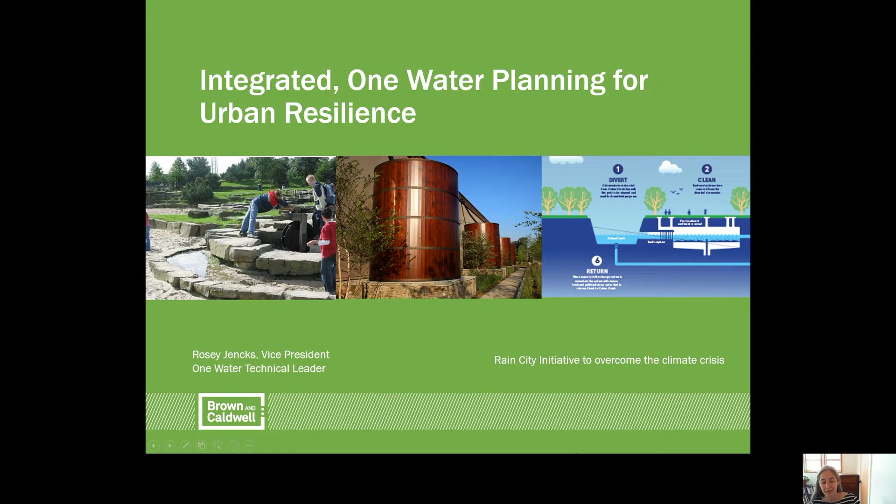Professor Hahn asked me to talk about the role of rainwater in a one water approach and describe some of the trends I'm seeing in North America.

One Water is an integrated planning and implementation approach for long-term resilience and reliability that meets the needs of communities and ecosystems. It's about managing all aspects of the water cycle from the top of the watershed to the bottom, encompassing all the natural and built sources and sinks of water.

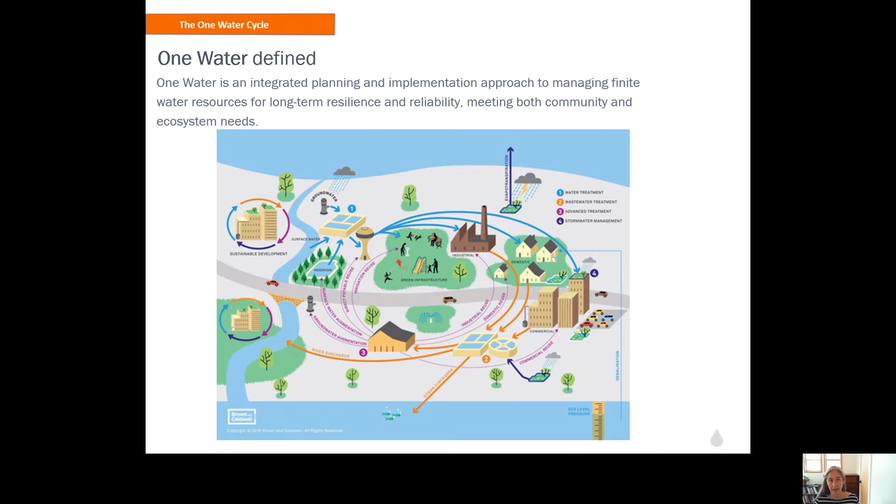As Luna Leopold says, the health of our waters is the principal measure of how we live on the land. In urban areas, we are rebuilding our watersheds every day. Each time we pave a road, build a house, or plant a garden, we have an opportunity to slow, sink, cleanse, and infiltrate stormwater. Rainwater is the most unifying one water element in our communities.

We can all agree that water doesn't follow jurisdictional boundaries and that watershed health and a one water planning approach cannot truly happen with our current regulatory and infrastructure paradigms. There are too few incentives to compel organizations to work together or to consider the full water cycle.

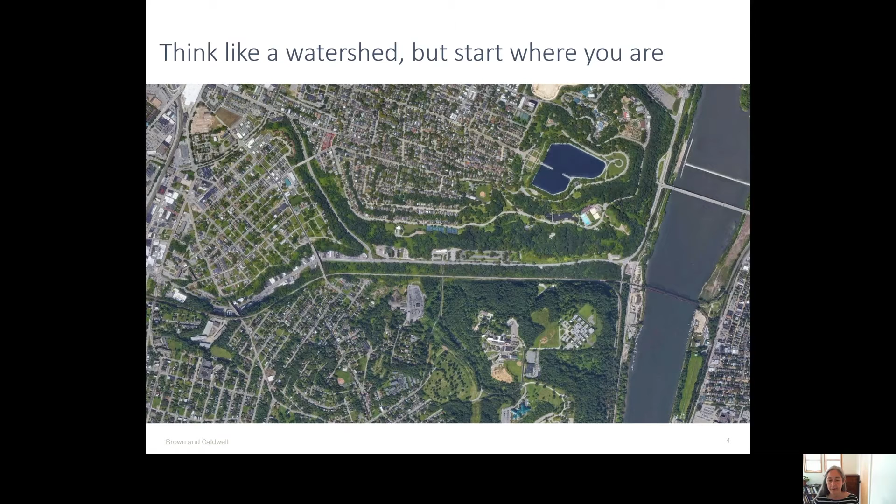Climate change is beginning to force these issues, but until we have new systems of governance and infrastructure funding, it's critical to think like a watershed, but to start where you are.

Today, I'm going to discuss the trends I'm seeing in North American cities. These trends include integrated planning, using risk-based approaches to integrate water quality with flooding and sea level rise, and using social and economic factors in engineering analysis, and working across jurisdictions to create multi-benefit solutions to solve citywide problems.

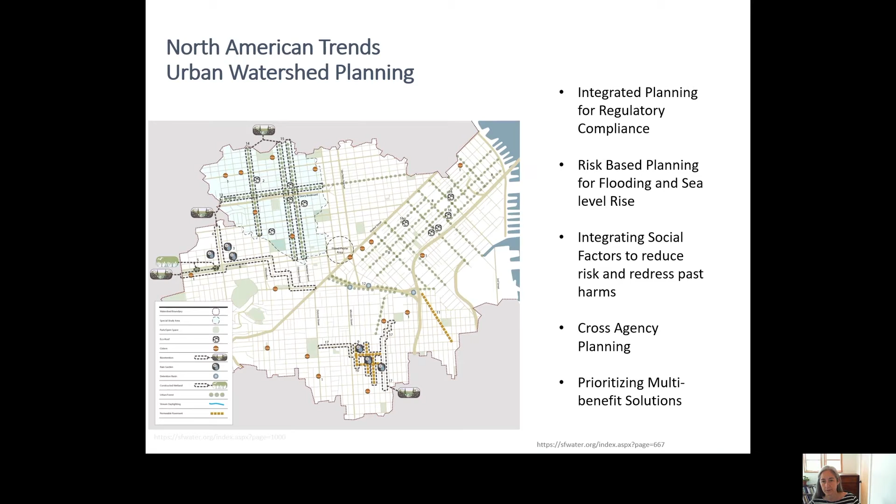Several cities like San Francisco, California, Vancouver, British Columbia, and Seattle, Washington are opting to bring in a wider set of considerations into their planning and going beyond simple regulatory compliance.

I'm working with the City of Vancouver on their sewer and rainwater management plan to integrate green and gray infrastructure for climate resiliency while seeking reconciliation with First Nations.

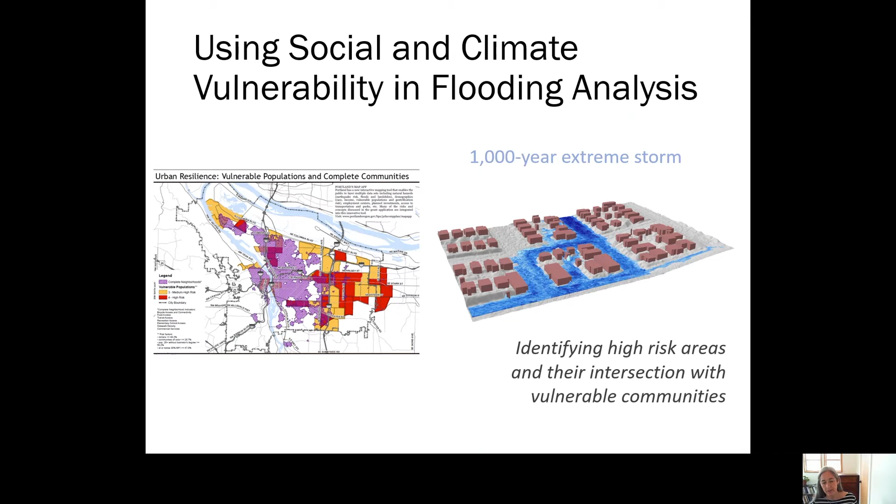Another trend that is worth mentioning is that engineering practice is beginning to integrate multiple forms of risk into decision-making. No longer is water management or flood management simply a technical consideration.

We are using information on social vulnerability and economic factors to overlay these factors with watershed and infrastructure needs to identify opportunities for multi-benefit projects that reduce risk in the most vulnerable communities first.

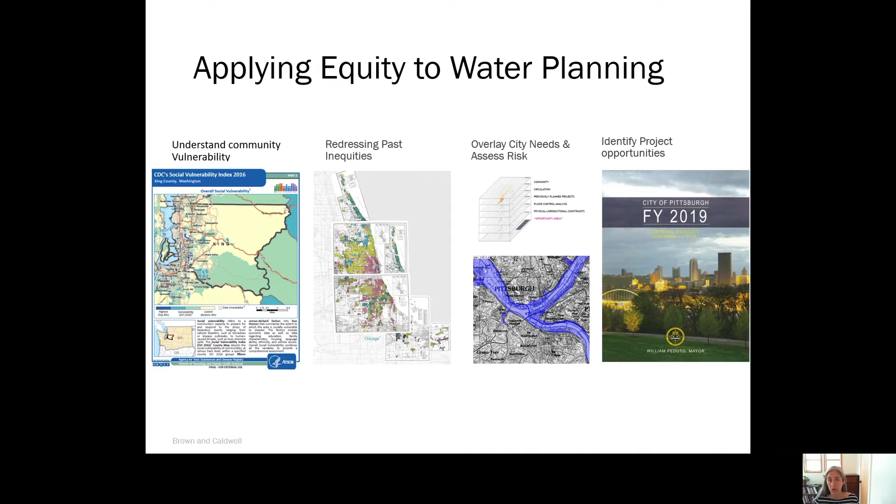Seattle's Shape Our Water Plan is a 50-year integrated drainage and wastewater plan developed through a lens of racial and social equity to prioritize partnerships for green infrastructure and resiliency in vulnerable communities.

They've hired a group of paid community members that represent various diverse communities to help design the stakeholder engagement for this plan to ensure that the recommendations are representative and reflective of community needs and priorities.

Communities like Hampton, Virginia are saying that they can integrate flood resilience and water quality with other community needs, such as pedestrian safety, heat risk, park needs, and transportation improvements.

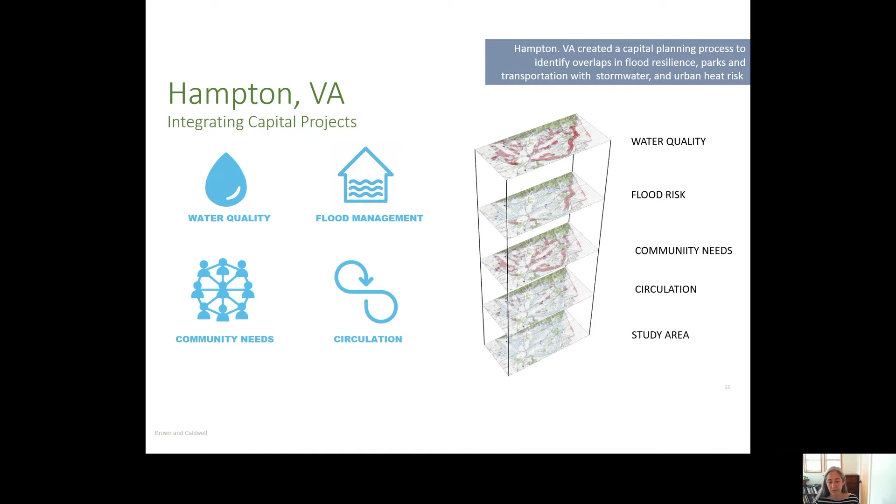And really the integration of these capital projects each time we touch the landscape begin to help improve on all fronts. Los Angeles is another example.

They're home to the largest urban street network in North America, and we're working with them to look citywide to identify areas of overlap between flooding and stormwater management to prioritize with other infrastructure risks such as sewer and water replacement, urban forestry needs, pedestrian safety, and urban heat risks.

And when we overlay these with an equity lens, we can begin to reduce risk again in the most vulnerable communities. This one infrastructure planning tool allows the agencies to pool their funding and build back their streets better while providing efficient use of public dollars.

So once you've conducted your watershed plan, identified your highest risk areas, you can identify where your watershed needs intersect with community priorities and develop projects that result in new landscapes and multi-benefit projects.

I've got a very short amount of time today, so I'm going to quickly give you some North American examples of green and complete streets, floodable parks, schoolyards, and looking at new examples of funding and governance.

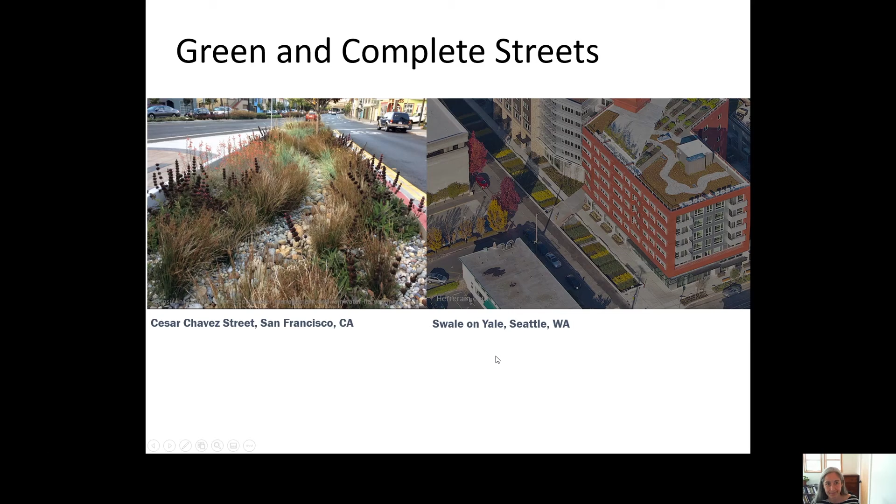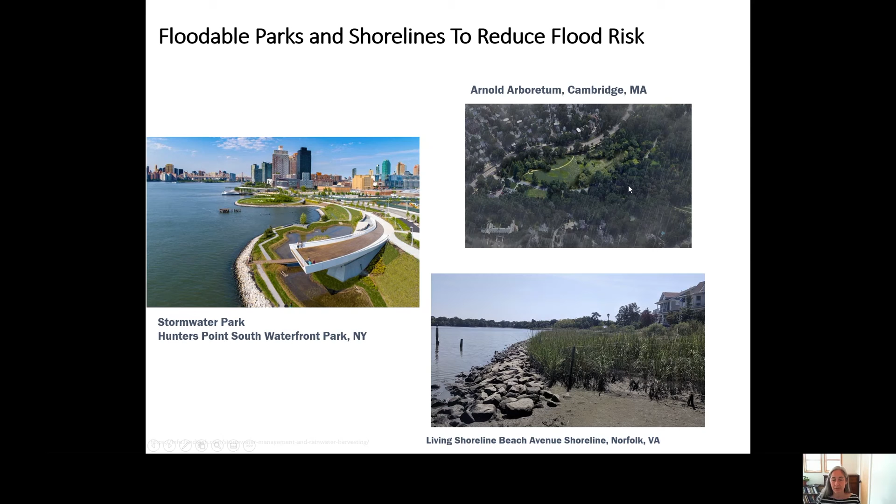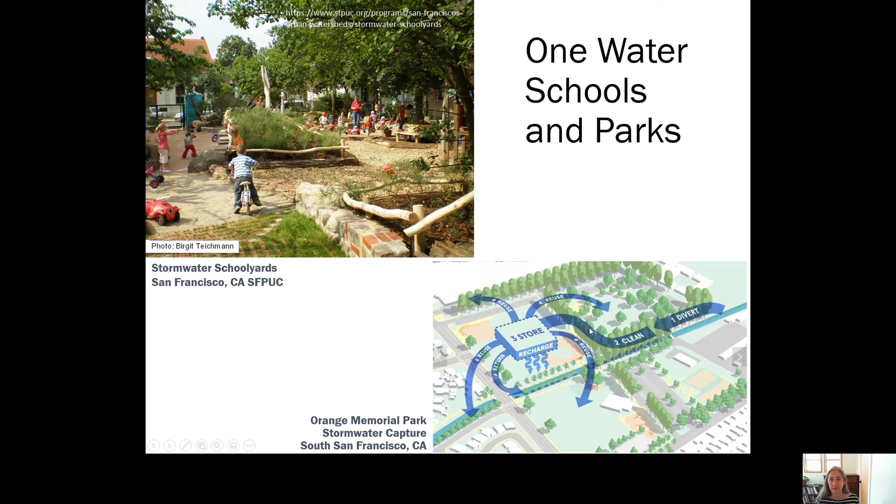And lastly, as I mentioned earlier, we really need to have new versions of governance and funding. Without these, we will not be able to achieve these goals of integrated planning and project delivery.